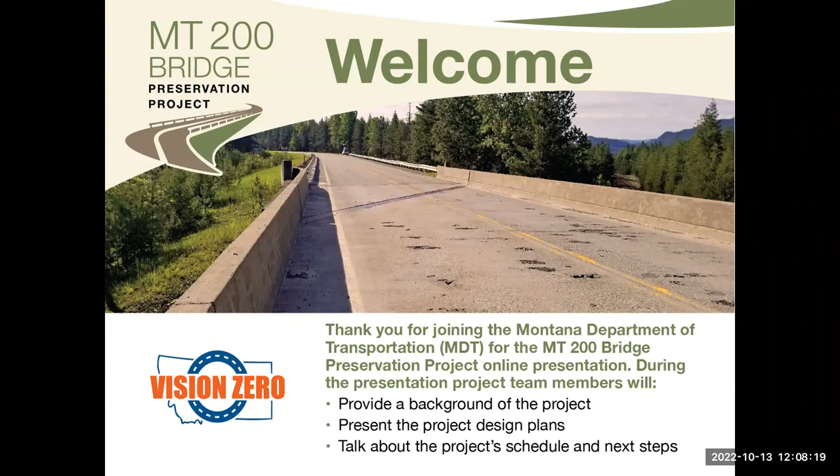So next, I'm going to give a little bit of background on the MDT Bridge Bureau. The MDT Bridge Bureau is tasked with keeping Montana's bridges safe, resilient, economical, and reliable. The Bridge Bureau is organized into two sections: the Bridge Management section and the Bridge Design section.

MDT's Bridge Management section provides condition inspection and load rating evaluation for over 4,500 public bridges in the state, which includes state, county, and city-owned bridges. The Bridge Management section also evaluates and analyzes overweight permit loads and performs bridge maintenance on state-owned bridges.

MDT's Bridge Design section provides design and engineering management on bridge replacement, rehabilitation, and preservation projects. The Bridge Design section also establishes and maintains design criteria and standards, participates in research projects, and promotes designs to improve bridge performance and value. So at this time, I'm going to turn it over to Ben Rickman.

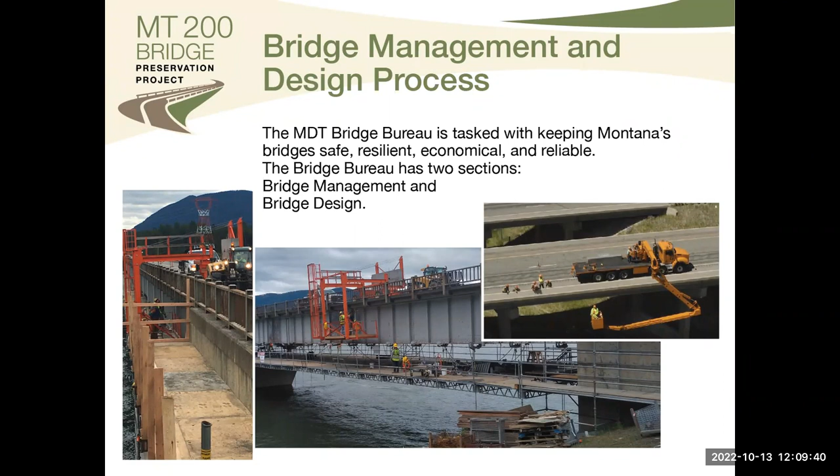MDT is in the final stages of developing improvements to the Montana 200 bridge that is located 2 miles south of Noxon over the Montana Rail Link tracks. The bridge is safe to drive on, but it was constructed in 1957, and it's in need of repairs and routine upkeep. MDT partners with Forest Green Associates to identify the needed repairs that will extend the life of this bridge and be the best return on our investment.

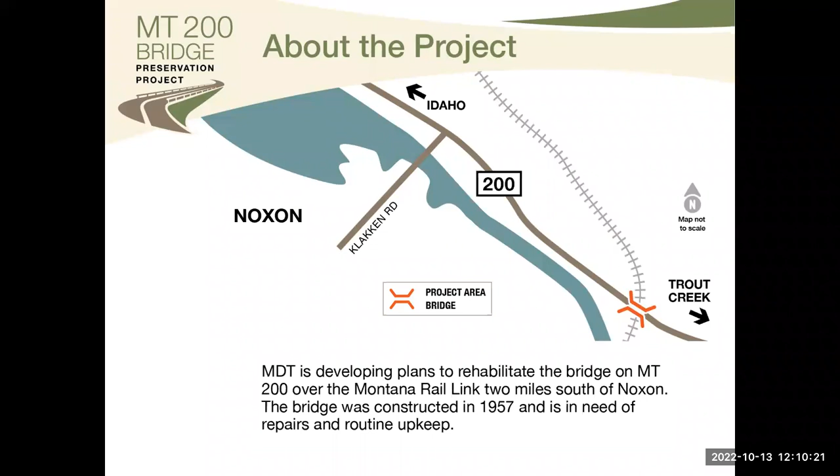The evaluation phase started in 2020. It included office review of existing plans, inspection reports, and other data provided by MDT. And then we sent out staff to do field evaluations of the bridge. That information from those office and field evaluations was all put together, carefully considered to develop repair and rehabilitation needs, and that was documented in a bridge report.

Those draft findings and recommendations were presented to the public in fall of 2020 in a very similar format as this. So now we're in the design phase, which began in 2021, and we anticipate that to be completed in 2023. In this phase, we're developing the design plans for the recommended improvements, and the intent of today's meeting is to share what we're planning on doing and gather public comment to finalize those plans.

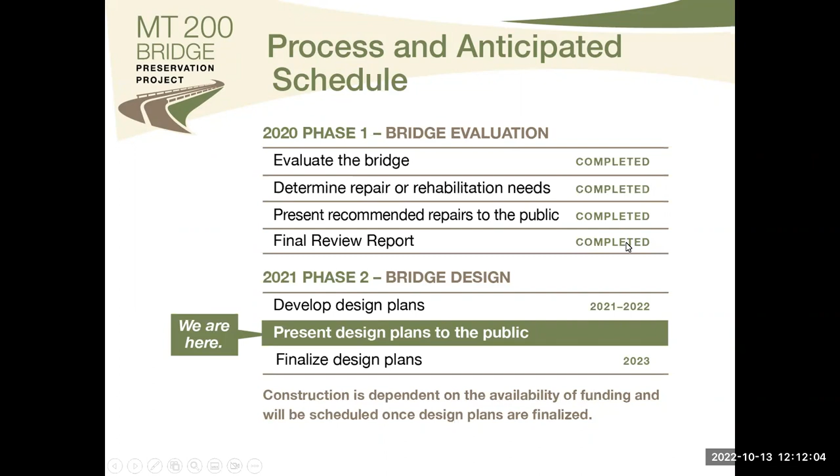The current schedule suggests that the earliest construction could occur is in 2025. However, that is dependent on availability of funding, and the actual year will be scheduled once the design plans are finalized and funding is determined. Next slide, please.

So now we'll talk about evaluating the bridge. As we said earlier, Forest Green is a consultant that was tasked with evaluating the current condition of the bridge. This was done by reviewing the past inspection reports to get a history, and then again, going out to the field to assess its current condition.

As part of that field work, our team not only looked at the bridge, but also at the needed traffic control so that we can perform the repair work, and also looked at potential environmental impacts, and also some, if there was any upgrades needed to the guardrail at the bridge ends to make sure safety is maintained.

We also spoke with local MDT maintenance staff. They have to do the year-to-year maintenance on the bridge, and they probably know a lot more of the issues than we could determine in one visit. So we talked with them, and they provided some very valuable input. All that information was used to determine whether we should repair the deck in place or if we need to replace it.

I want to talk about those two real briefly. If we patched and replaced, we call that patch and overlay type of repair. That involves removing unsound concrete, basically potholes in the driving surface of the deck, where concrete has popped up. Then you'll see the patches in there, as you saw in some of the photos earlier.

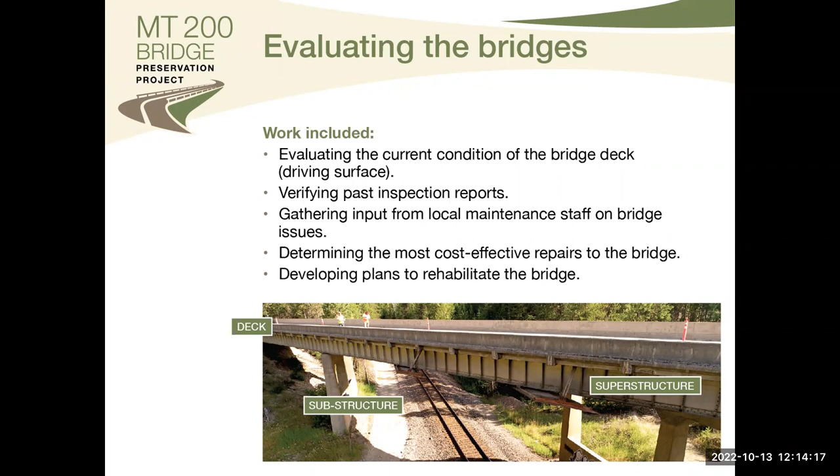If it's got a lot of those conditions happening and the majority of the deck is really in bad shape, then we'll do a full deck replacement. That's a complete removal of the driving surface, or what we call the bridge deck, and then we'll replace it with a brand new reinforced concrete deck. Based on the actual bridge evaluations, input from the public, and maintenance, we're going to move ahead with a full replacement of the bridge deck.

Let's talk a little more about that. If you look at this photo, that kind of tells the story. There's a lot of obvious patches, potholes, whatever you want to call them. So we're going to move ahead with that full replacement.

Our field crews, when they went out there, did a sounding test, which we call chaining. Essentially, you can hear the areas that are broken up and are going to start popping off that you can't visually see. When we did that, between what you can see and what you can hear, about 77% is what we call delaminated, meaning those potholes are going to happen. Given that information, we determined that the most cost-effective repair is a full deck replacement.

We know this is a very vital component to those traveling in this area. There's not an easy detour, so we are going to provide one lane of traffic during construction to keep traffic moving through there. I'm going to turn this over now to Dan Gars to discuss that.

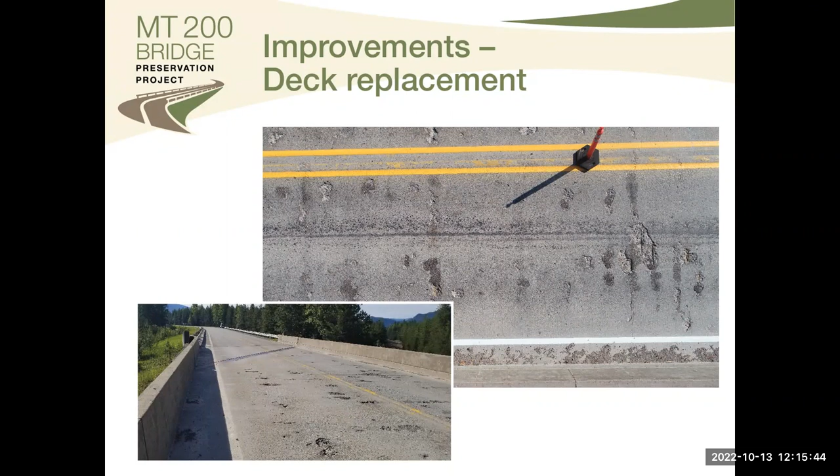Thank you, Brent. I'd like to start the traffic control portion of this presentation by first stating that we are not closing this bridge. In addition, access to Government Mountain Road on the southeast side of the bridge and access to the mill on that southeast corner will remain open. The construction described previously by Brent Schiller in the last few slides will limit traffic to one lane, and to control that traffic we will be utilizing temporary traffic signals and/or flaggers throughout the construction process.

For a majority of the traveling public, there will be no detours needed to travel on this bridge on MT 200. The project overall length is around 700 feet, so delays to the traveling public will be minor. One other thing I'd like to point out is that we have specified the use of temporary barrier rail. This barrier rail will provide positive separation between the traveling public and the contractors completing the bridge work on the deck. With that, I'd like to hand it off to Pat Wickman to discuss the environmental portion of this presentation.

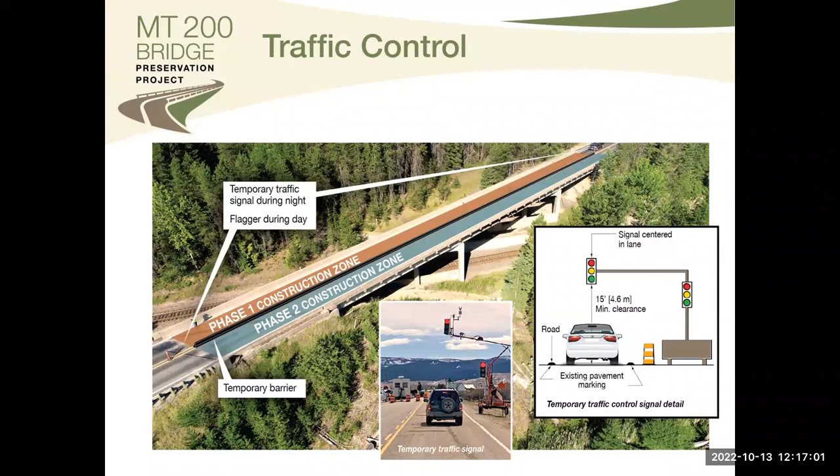Thank you, Dan. This is Pat Wickman with Forest Green Associates. For environmental, as part of any federally funded project, MDT needs to ensure the project is compliant with the National Environmental Policy Act, as well as the Montana Environmental Policy Act. In doing that process, we add any appropriate environmental considerations into the project design.

For this project, we analyzed potential impacts from replacing the bridge deck, with almost all work constrained to the existing bridge deck and the roadway approaches from each side. We conducted a site investigation to look for potential environmental concerns before preparing an environmental document called a categorical exclusion, which is the typical document used for projects with minimal environmental concerns.

The document evaluated project compliance with the categories listed on the screen. These include the Endangered Species Act, the Migratory Bird Treaty Act, how to safely work in bear habitat, and also deal with wildlife crossings. Furthermore, we tested the concrete on the bridge for asbestos and the paint on the bridge for lead, which came back minimal. So no significant impacts were identified, and the environmental document for the project was approved back in March 2022.

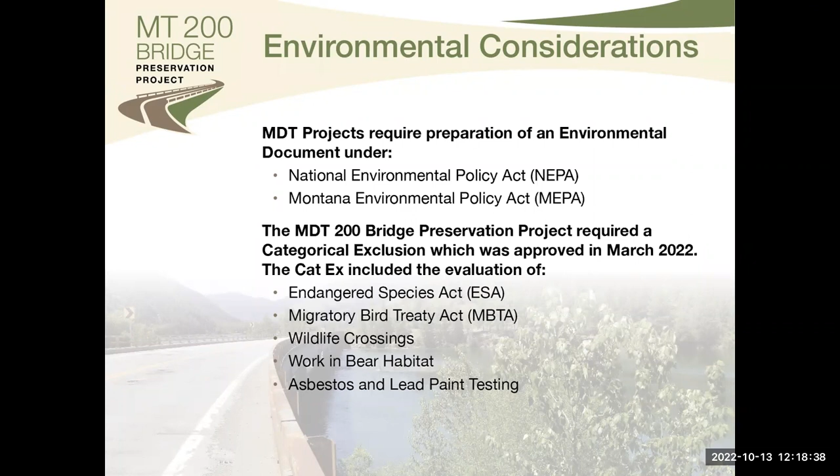I think that covers the environmental component. I'll turn the slides over to Ben to talk about the next steps.

Thanks, Pat. As we discussed earlier in the presentation, we're in the final design phase of the project. The current schedule suggests that the earliest construction would occur in 2025. However, this is dependent on the availability of funding, and scheduling for construction will be done once final plans are complete.

Once we let the project for bid and a contractor is selected, MDT will provide additional notifications and outreach to inform the public about construction. I will turn it back over to Brandon Coates now.